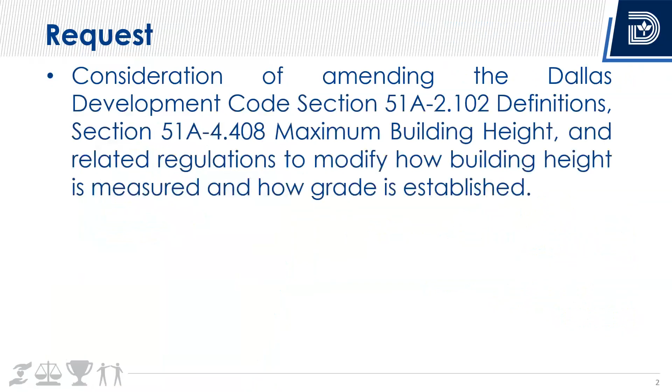Yes, so that's our consideration. The background, it did originate with building inspection, now called Development Services Department. Basically, it comes from a struggle that staff has where we have a different definition and way of measuring than International Building Code, International Residential Code. And so we have to ask for new things to be shown when there's a complicated site. A lot of sites in Dallas, it's kind of a plain area of the country, kind of flat for the most part.

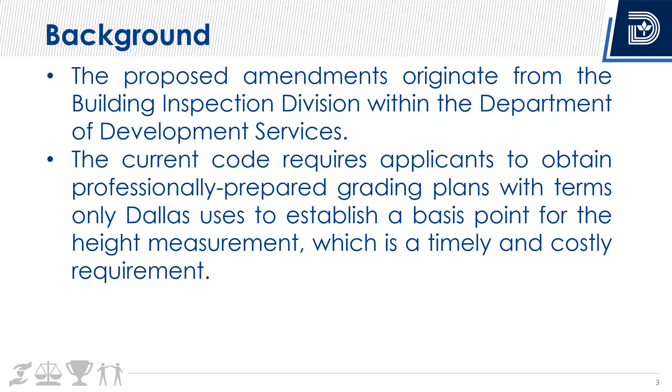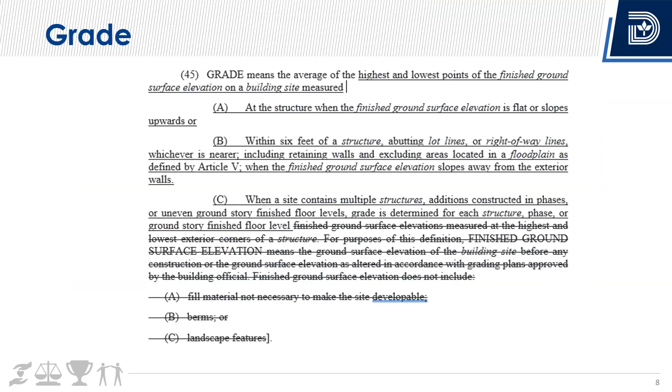Right, so we would still have to take the definition or calculation of grade as the average of the uppermost low, like the uphill low within 6 feet, and the lowest low, the downhill. I couldn't figure a better way of saying that. I'm sure our attorneys can help me out, or y'all can if y'all have good ideas for fixing that. Highest point and the lowest point.

Right, so yeah, it's the average. So if they just want one finished ground surface elevation or finished floor level for the entire structure, then we're going to look at where that finished floor is in comparison to this. IBC calls it a grade plane, which is probably a better term for that, but two words are harder than one in our code, changing it everywhere else. So it's that difference from the IBC grade plane to the finished floor. If that difference is more than 18 inches, then we're just going to make a step back down to the grade to measure height.

So to measure height, grade is then measured by, or height is then measured by that grade rather than the floor. Is that what you just said? Correct, that's right. Which is generally consistent with our current code.

Is that correct, Ms. May? That would be consistent with our current code, except for the 6-foot part. We're adjusting how we're measuring that, trying to take into account where we may have topography changes, where we've got many streets that have a slow, gentle rise where we're seeing fill coming in and seeing these adjustments happen over time. Yes, that's what this is trying to take into account. Is that correct? Exactly. Thank you.

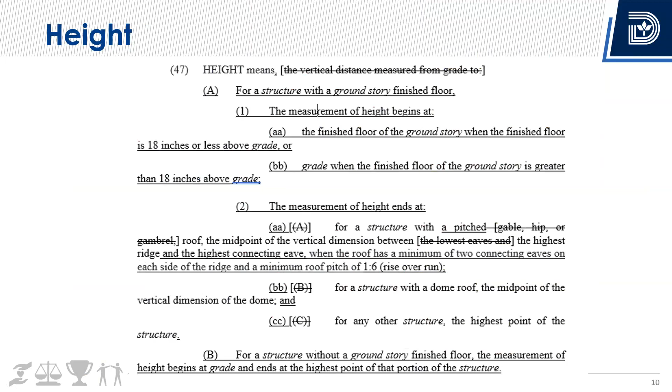Commissioner Popkin, does that answer your question? Yes. You have a follow-up? Just to clarify, okay, so what you just said was before we were measuring height from average grade, and now this addition of Part C allows height to be measured by average grade or that floor, if that floor is more than 18 inches above average grade.

Right, right. So you would kind of have like zones while you're measuring grade, so the original building kind of has their own grade zone that you're going 6 feet out from. And this new addition has their own little grade zone, instead of having to measure the entire old and new addition, or this split level, having to average everything out to have this inconsistent low on one side and giant on the other.

Okay, so in that previous example where the garage was dug into the ground and it kind of looked like maybe there was a berm so that the first floor started a little higher than maybe the average grade was to begin with, if that garage height were more than 18 inches over the average grade, then that garage would be the first floor?

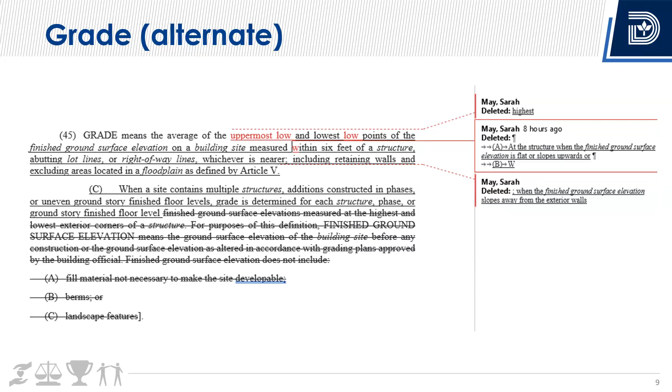Okay, thank you for that quick recap. I appreciate it. I think I'm clear on it. No problem. Commissioner, this is very dense, and I appreciate Ms. May digging into this, but we're all getting up to speed. So thanks for the questions. I'll keep drinking my coffee. Thank you.

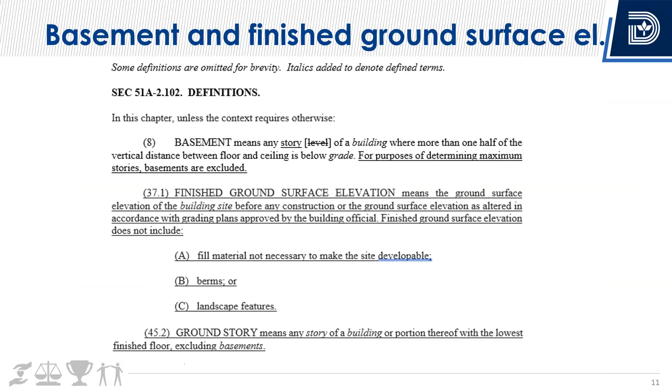This just is kind of fixing some definitions, and to let you know we're not getting rid of this whole dirt skirt concept, it's still going to be in here. And defining ground story, because we do it in Article 13, but it's not defined in 51A. We just kind of have to make our best guess.

And then skipping over to the maximum building height section. One change, which probably warrants some discussion, is our code currently only allows these extra things to exceed maximum structure height, not to exceed 12 feet, in districts where the building height is limited to 36 feet or less. So this is going to be all of our R, D, TH, MF1 and 2, not MF3, not the mixed use districts, not the CR districts, not the CA1 districts. So only in districts where we want shorter buildings do they get these extra things that can go on top of a structure.

And it's created a lot of PDs that, you know, probably not the only thing in a PD, but I've seen multiple PDs where like, oh yeah, and we also want to add these extra things on top of our maximum structure height that we've worked with the neighborhood to come to an agreement on. And I was looking at our appendix for our sister cities, and if you look at Richardson and Plano, and I think some other ones in here, they just include that exclusion, a lot of these exclusions, in their definition of height. So in those cities, it's always exempt.

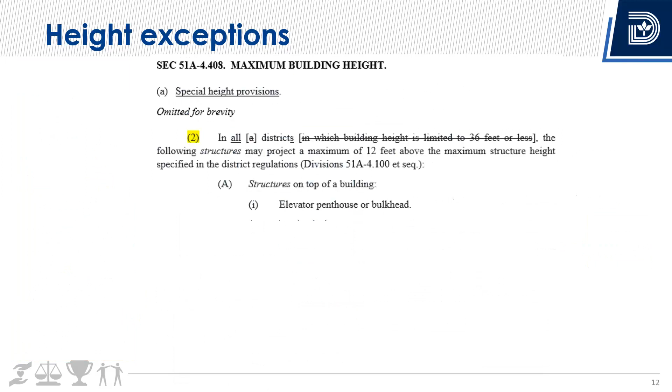Mechanical equipment rooms have been allowed to exceed the maximum structure height for a very long time, and I don't know when it started, but it must have been at least 12 years ago, if not longer. Especially when we're thinking about our multifamily structures in the MF1 and 2 districts, access stairs to the roof have been allowed to project above the maximum structure height, not to exceed 12 feet, because the rationale was, if they're allowed to have mechanical equipment rooms, don't they need stairs to get to it? So that opened the door for these access stairwells to be above the maximum structure height, but it had no regulations to regulate how big it could be, where it could be, and things like that.

So it looks like we're adding a whole bunch of things, but the intent is to set some parameters to have those access stairs not at the front facade, to make a really tall-looking building. If you put that stairway right up against the front facade, it could look like a 4-story building at that point. So the point of having the setback in double B is to have it set back.

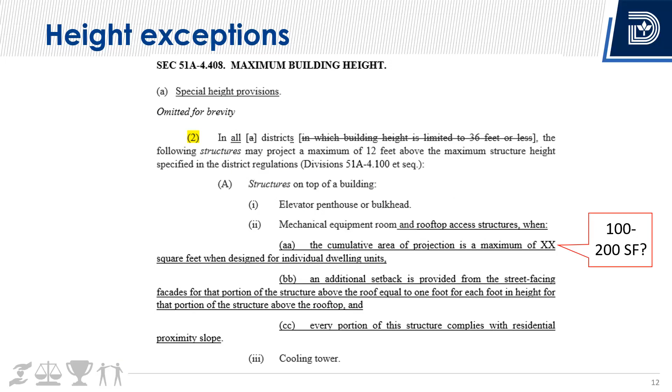So I just found some random multifamily plan that was in review, and they have this, all of the staircase and a mechanical room that does not exceed 70 square feet, and measured it. It came out to 171 square feet, and the stairway measured to be about 100 square feet. Yeah, and the mechanical room was about 70.

Any thoughts on the size? Do we want to talk about, are we absolutely against access to stairs in the first place? Or do y'all want to talk about any of those things right now? Sorry.

Members, any questions? I would say I think this seems like a reasonable addition. I think it addresses some of what you're seeing in building code. I think defining what that size is, I was going to ask you just from experience, I was trying to do a quick calculation as well. I think using the 70 feet for a habitable room is a good reference point to ensure it's serving its intended purpose as a mechanical space, a service space, and then including a stair of a reasonable size with a little bit of flexibility sounds like a good approach. Are there other comments or thoughts?

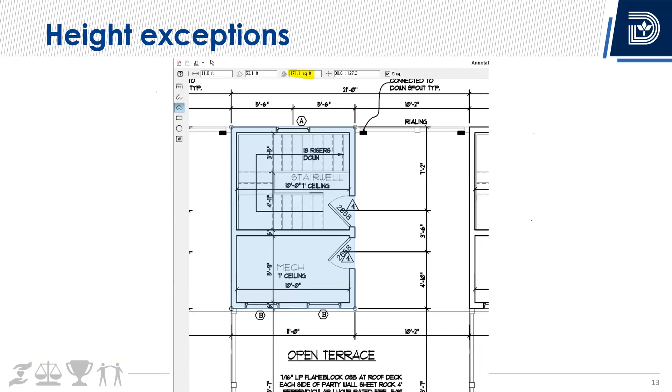So I think we have 2 more items, is that correct? Yeah, probably. Okay, so yeah, and it can't be above residential proximity slope.

And I just put a little balloon there just to not mislead anybody that these things are allowed to exceed residential proximity slope. This is just a copy and paste, I think I got it from CR, I'm not sure, but it says exception, except for chimneys. Structures listed in 51A 4.408A2, which is this section we're talking about, may project through the slope to exceed 12 feet above the slope, blah, blah, blah.

So this double C down here is just to say, you know what, no, this can't go above RPS. So, and okay, and then also I think staff has noticed that there's kind of been a lot of advantage taken of the term clerestory.

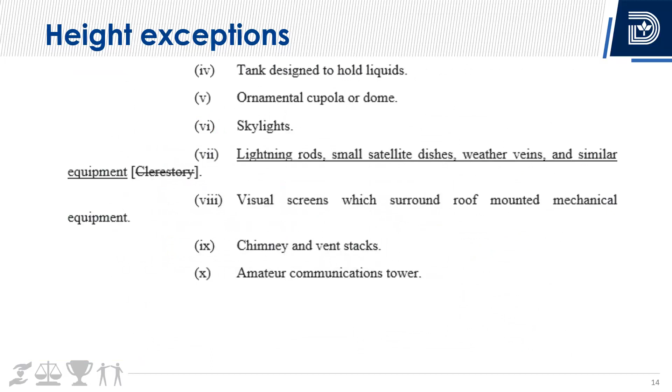Or maybe they can think of something else. They can still do skylights. But anyway, instead I was proposing maybe we could replace that with lightning rods, small satellite dishes, weather vanes, and similar equipment, since that's not part of the list. I was even thinking maybe solar panels or something.

Okay, and then just these last things, guardrails is proposed to kind of be a partner with parapet wall, because we've seen that a lot. Above the maximum structure height of the district, just to clarify, because it just said limited to 4 feet, and you can run with that.

Is that 4 feet above the deck? Is that 4 feet above the maximum structure height? So we have maximum structure height here.

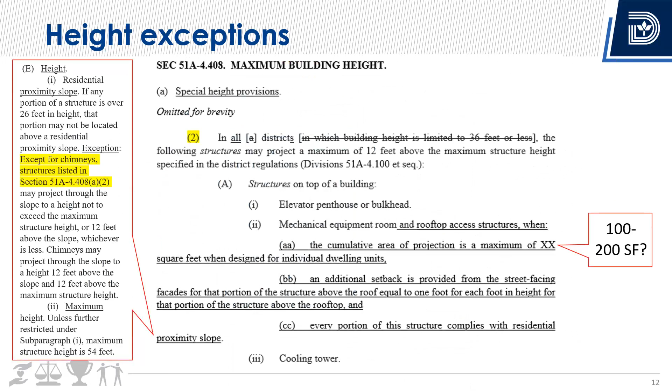And this note that's crossed out, it's a conflict with this other paragraph we were reading, that says these structures listed here are exempt from RPS. And this is saying A2 are subject to residential proximity slope. And it's just, this note has not been enforced like that. We've taken the district regulations that say you're exempt. So it's just eliminating a conflict.

And then on this number 4 that's highlighted, instead of limiting these provisions to our lower density residential districts, it should just be a standard to not allow dormer eaves to project above maximum structure height.

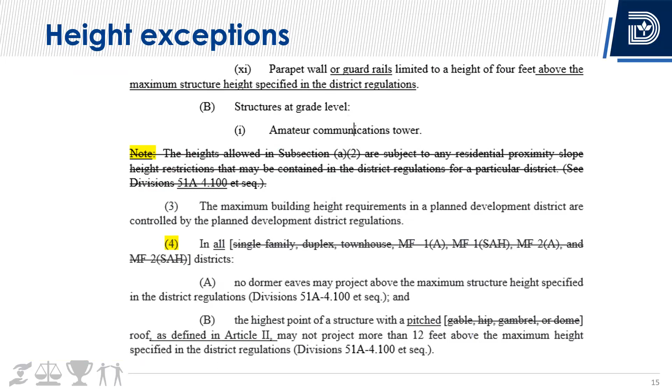And since we're getting away from what a gable, hip, and a gambrel roof are and what they mean, I just changed it to be more consistent with the, I guess I didn't even talk about that, but anyway, to have a pitched roof, and we can go back and talk about that, but basically it says you have a ridge, 2 slopes, and we're going to measure from the highest eave, as Stephen briefed us months ago now, probably. But it was just to be consistent with that.

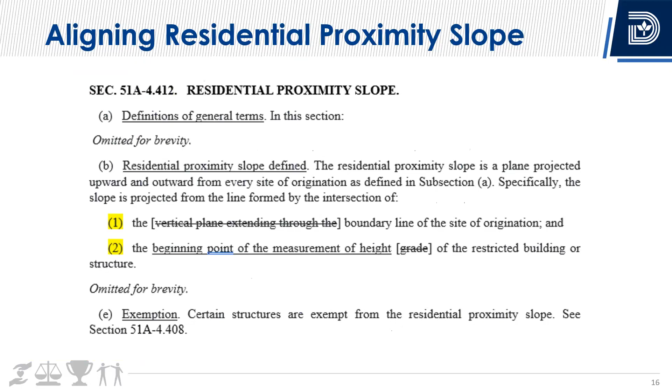And just trying to align residential proximity slope. This whole vertical plane extending through is just kind of wordy in my opinion, and doesn't change the meaning. And since it was always measured from grade of the restricted building, I'm just aligning it with the proposal to be the beginning point of the measurement of height. I'm sure that could be worded better, maybe, to be consistent with how we're redefining height. Let's see, okay, that's in a nutshell, a lot in however long it is.

Mr. Hall? Yeah, just a quick one. Who determines grade? Is that the developer, the builder?

Well, building inspection staff have to, I mean, it's lovely when the designer or whoever's proposing the plans has thought about it and done it, but essentially it's staff that's going to take a look at it and say, this is the right way to measure. And it's always been like that.

At what point would the city go out and confirm grade or check grade? Is this strictly looking at blueprints, or do they go out to the site? Well, for our single family and duplex construction, they don't have grading plans unless they're proposing to raise the grade by 12 inches or more, and then they have to go through full engineering and grading plans approved by the city.

But everything else, essentially, especially new construction and most additions, they'll have to have some grading plans approved by our engineering division. Chang Ho's here, but yeah, they're looking at getting the water to the right locations, it's not going to flood properties, and make sure everything's safe.